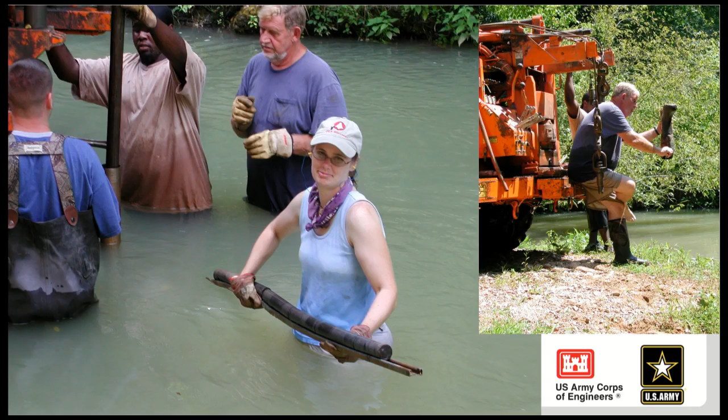And never mind, there we go. And if you told me I was going to be doing this in high school, or even the first part of college, I don't think I would have believed you. I didn't even start out college as an engineer.

And I have to admit, I spent a good bit of my childhood thinking that I did want to be an engineer. So there's a funny little part of this story: my 4th grade teacher burst my bubble completely when she didn't want to talk about driving trains when we were talking about engineering in math class. Yeah, I really did think that for a while.

So I know that life can be a little unexpected, and I ended up becoming a geologist and later an engineer. I was really surprised, though, when I ran across a speech by former President Dwight Eisenhower in 1957, and he said something that I think is relevant to us today within our profession.

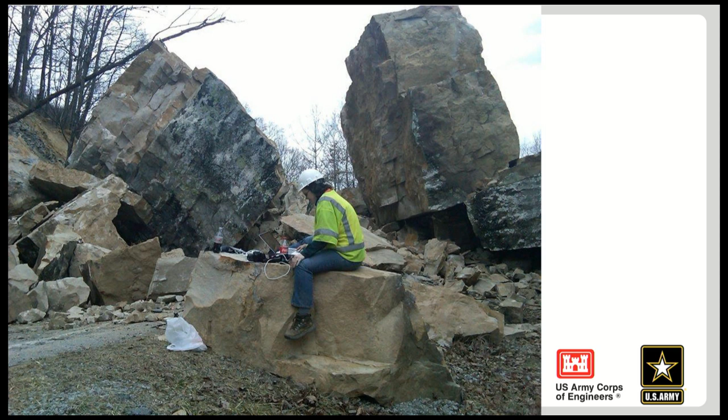Which is why one Sunday when I thought I would be attending a Boy Scout breakfast, I ended up on top of a rock, as seems to happen a lot in my career, dealing with a toppling failure. And so it rained. I wasn't surprised to get the phone call, although I was definitely surprised not to get to eat my bacon.

But it struck me as I was thinking about this speech that you learn a lot from this kind of dichotomy, this tension between plans and planning, doing this kind of work. Plans are useless, but planning is everything. After all, some of the best rock drains I ever designed started out as rock bolt holes.

We drilled them for an entirely different reason, and the hole decided to make water and continue to make water. So you could say, I'm determined this bolt's going to go right here and deal with the water problem, or you can say, I really did need some drains. I think I'm going to make a new bolt hole over here and let this thing drain and let this one make water. The essence of the observational method is to look at what's happening while you are doing something and react to it.

We know emergencies don't happen exactly the way we plan. One of the things that I don't think we think about enough as a profession, though, is what happens when one common driver affects a wide variety of infrastructure at the same time.

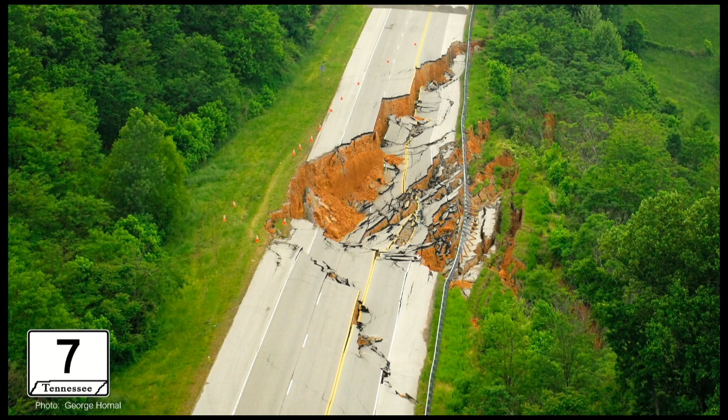So this is something that I think we really need to pay some time to. Some of these turned out to be quite large. Not all of them were small.

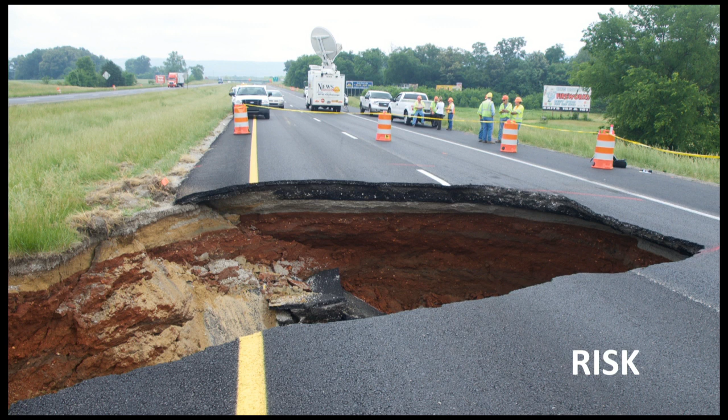And that brings us to this word, risk. We use it a lot, right? You hear it in a lot of presentations, risk. We talk about it. And we have to understand with our work how our projects can fail, under what circumstances, because it is fundamental, absolutely fundamental to good design and to developing resiliency within our infrastructure.

We look at the probability of failure. What's going to happen, maybe? How likely is it to happen? And what are the consequences of that?

Because not learning these lessons from previous projects can be catastrophic, right? You don't want to repeat mistakes of the past, even if it was not foreseeable at the time. You've got to learn from these failures to take these lessons forward.

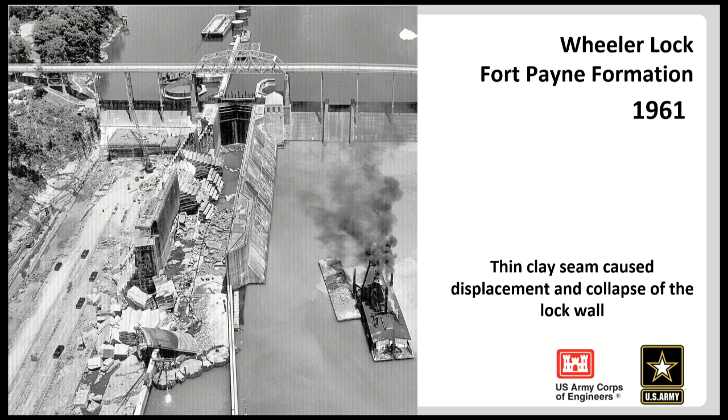We don't want lock walls collapsing inward and killing workers in the middle of an excavation. This is not how we want to see things happening. And so we design with these kinds of potential failures in mind.

It's the essence of what the Corps and many others call risk-informed design, right? The idea that understanding your potential risks improves your design, improves your safety, improves the ability for you to design and monitor your projects in such a way that you can address these issues and deal with some of the challenges that may be ahead.

It's also why long-term monitoring, emergency action plans, and risk assessments are so important, because that's that planning piece we were talking about earlier, the difference between plans and planning. And it has something else here - it helps you develop your judgment. The judgment that you need to address these kinds of risks and to handle emergencies starts right here with planning.

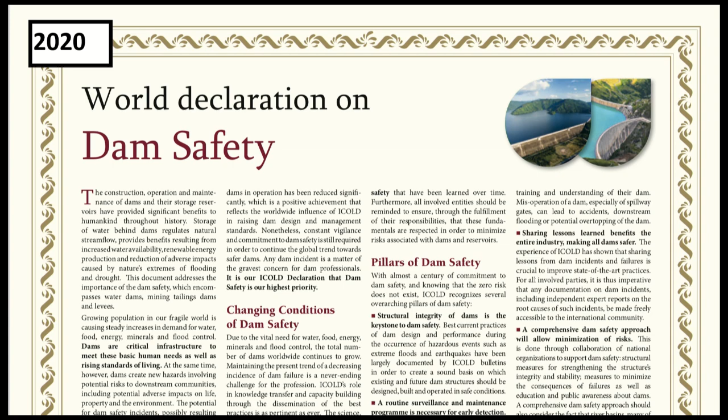With relentless preparation and study, it's not enough to just finish school. It's great, you got a nice shiny degree, you graduate, you walk out into the world, you take your PE exam. Oh great, I'm a PE, awesome.

You're not done. You're never done. Because as former President Eisenhower remarked later in his speech, if you haven't been planning, you can't start work intelligently. That's why it's so important to plan, because it keeps you steeped in the character of the problem you may one day be called upon to solve.

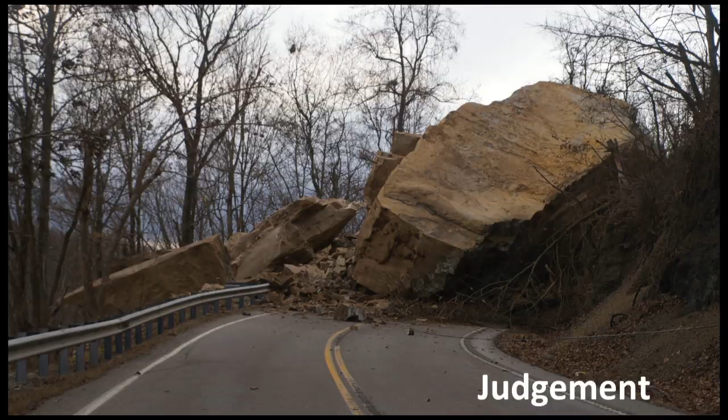Again, relatively profound. He was talking about national security, but it's got a lot to say in our area as well. So where does judgment come from? This is a question we've been asking ourselves in our profession for some time. Well, certainly it comes from experience, yes. And as Dr. Marr quipped in a recent presentation, it also comes from bad judgment, right? Learning from the mistakes of the past.

But I think we develop part of the judgment we need because of this fundamental dichotomy, this knowledge that we cannot define everything, that we are going to have to deal with the unexpected during construction, during long-term monitoring, dealing with our infrastructure. We have a dynamic situation we have to cope with. Failures are uncomfortable. We don't like to talk about them, at least when they're ours. It's a lot easier to talk about somebody else's failure than your own. But they are one of the most important teachers we will have and the most important guides to better judgment.

And so we must always be looking at these kinds of risks to our plans. How likely are these drivers to happen? We have to consider this in our designs as a whole. How will our infrastructure react to problems we may not be able to control, to forces we may simply have no control over? And how are we going to design for that? Do we design for that? How much do we design for it? How big do we build it? How much resiliency, you've heard that word a lot, do we put into the system?

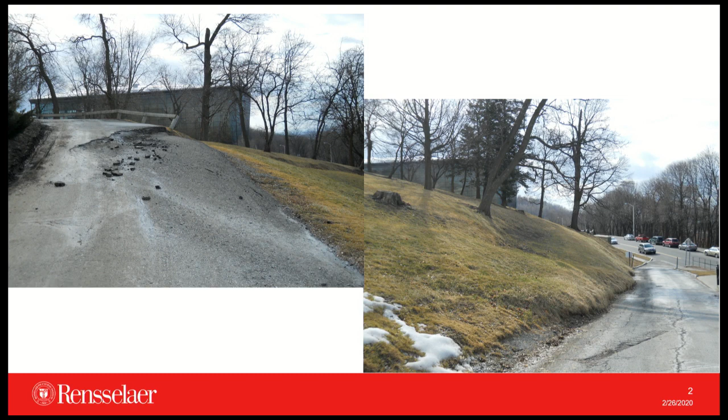Even if you don't want to spend time teaching your students or hoping they learn engineering judgment, those of us who report to ABET will have to find a way to assess that. That's part of the new criterion for ABET. I just heard from Scott Brandenberg that being the ABET coordinator is not a job anybody should take on, and it's my new job in our department. But I'm hoping that the work we're doing at RPI gives you a tool to assess engineering judgment in your students, even if you don't know how to do that yet.

The next piece is really about learning. Maybe all of us could close our eyes and think back to a time we had an impactful moment in a classroom. For me, it was in my earth science class with Mr. Kenzel, who would make this face imitating students taking a Scantron exam, pressing the pencil so hard they'd rip through the page, tongue sticking out. That's burned in my memory as an impactful learning moment. Maybe there are special things we can do in the classroom to really engage students in our topic, in geotechnical engineering in this case.

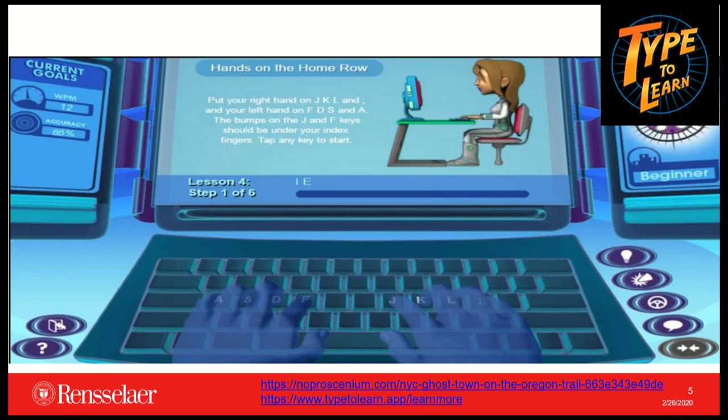But I want to speak to an educational game that we're working on at RPI. Educational games have been around for a while, and obviously some leave lasting impressions on our personal educational journeys.

I'd like to think that perhaps GeoExplorer is part of the future of educational games. It was developed through NSF funding and collaboration between researchers at RPI, Northeastern, Southern Methodist University, Broad-Based Knowledge, Cal State Fullerton, and Manhattan College. The important tenets were to provide practical field experience to undergraduate geotechnical engineering students and build in assessment of their performance within this virtual space. Teaching engineering judgment is a gap in our current pedagogy.

Now, as we travel on this virtual road, let's see if perhaps this is a way to teach engineering judgment. We are arriving at a field site where students can conduct a CPT. This exercise is part of an exciting new mixed reality experience to integrate field testing and practical experience into the existing civil engineering curricula. Students have the opportunity to conduct a CPT at four different field sites.

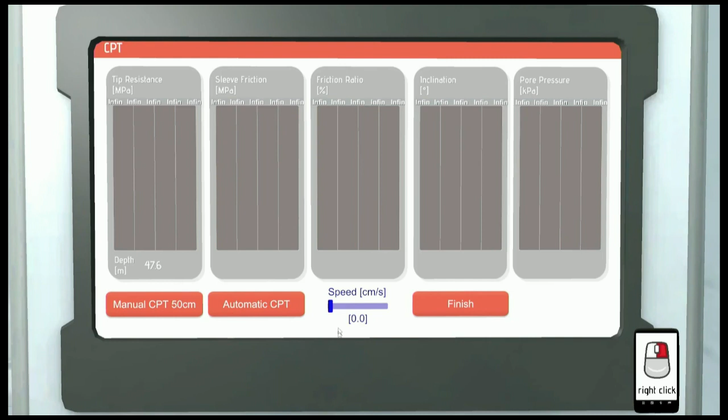The messaging that appears on screen consists of questions that in previous educational research would likely have been included as a survey or in-class assignment. This built-in assessment tool allows us to gather information about the student's knowledge and confidence related to CPT in a sneaky way, simply as a conversation with the boss.

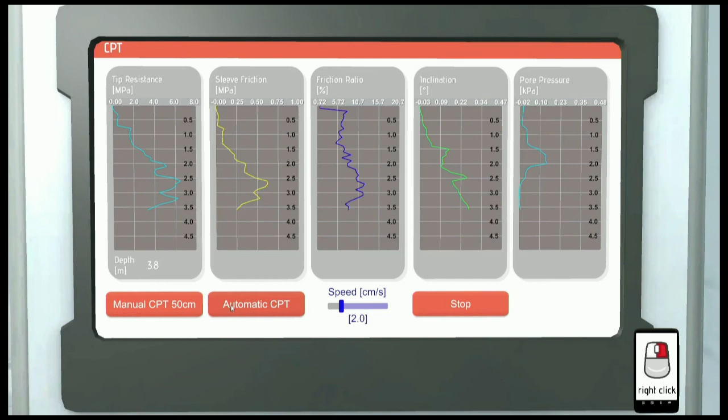As we begin to collect CPT data, this is further opportunity for students to learn through doing. Students must select the speed to advance the cone, using manual advancement for the first few meters before setting the test to automatic. As the cone advances, students must monitor the tip resistance values and inclination angle. The stopping depth is selected by the student based on their own judgment and instructions from the boss. For each site, students interpret their collected data and report back to the boss about the soil type encountered at a relevant depth.

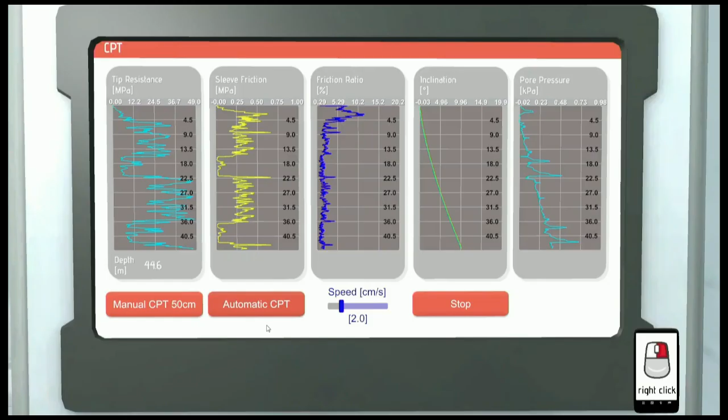The student's selections are recorded along with other gameplay data, such as how long they spent on certain tasks. A valuable feature of this CPT environment is the ability for students to fail with a safety net. As you saw there, one student said, 'My boss is going to be mad.'

We will combine the previous Levee Patroller assets into the GeoExplorer space. In this new robust GeoExplorer game, we will provide lots of opportunities for students to practice engineering judgment, and through the built-in reporting feature, we may also have an automatic assessment of their applied judgments. The mixed reality piece of this project is currently realized through a mock internship experience with the fictitious company Terra. Students apply for a position on the Terra website and receive an email with their welcome package and instructions to complete assignments within the virtual environment.

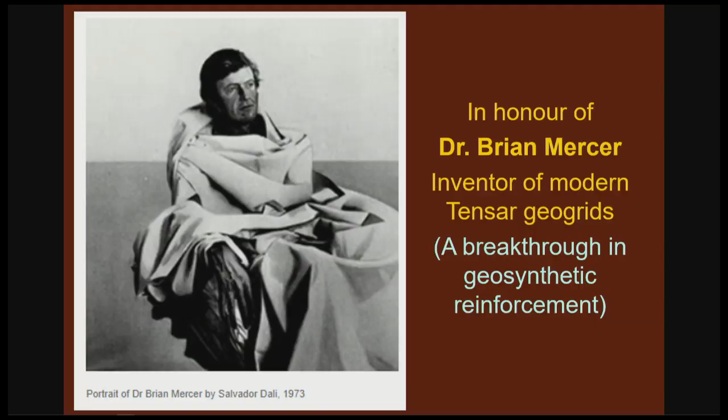It seems that today is a day of 40-year reminiscences. What I'd like to do over the rest of this talk is have you join me on a 40-year exploration of the role of geosynthetic reinforcement in allowing us to build embankments on soft and difficult soils. At the end of this presentation, I'd like to leave you with three key points. Firstly, it has now been very well established over decades that geosynthetic reinforcement is a very cost-effective means of building or augmenting soil behavior in constructing over very difficult soils.

In designing and constructing embankments on soft soil, reinforcement can play a very key role, so it's essential to understand the properties and characteristics of that reinforcement if we're going to have good long-term performance. However, reinforcement is not magical. It has never been to Hogwarts. It is never delivered with a wand or skyhooks. Like every other engineering material, for it to be effective, it must be incorporated in an appropriate design.

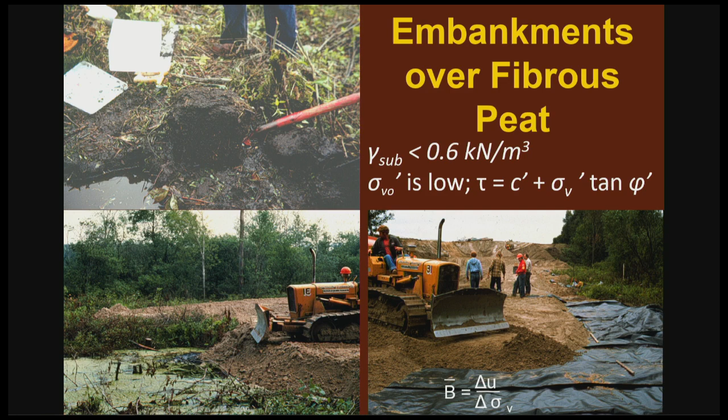We need to consider the pore pressures relative to the applied stress, and we need to control the pore pressures so they do not exceed a reasonable value. Even with that, it's a challenge to build over peat.

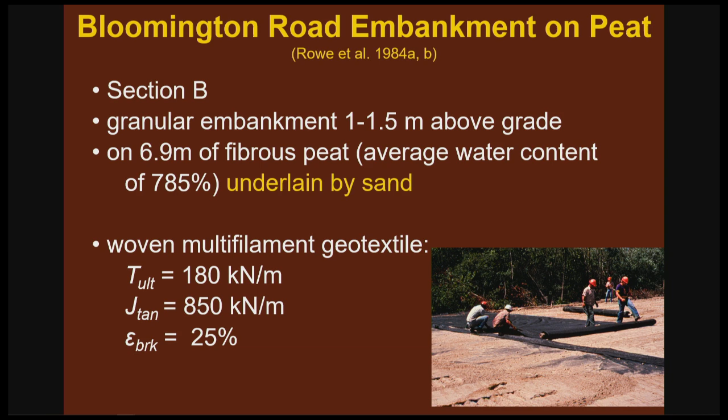Our first objective was to build a 1 to 1.5 metre embankment above grade. We had several instrumented sections, but the most challenging was over 6.9 metres of fibrous peat underlain by sand. For this, we used a very strong multi-filament geotextile with an ultimate tensile strength of 180 kilonewtons per metre, a tangent stiffness of 850 kilonewtons per metre, and a break strain of 25%. This was the first time in Ontario this had ever been attempted.

The embankment was constructed in 3 stages; we're going to talk about 2 of them. In the first stage, 2.74 metres of fill was placed, and at the end of fill placement there was 2.6 metres of settlement. But the reinforcement was working and had developed a strain of 5%.

It was then left for 8 months to allow pore pressure dissipation. When we came back at the end of 8 months, our 2.74 metres of fill had given rise to 3.1 metres of settlement. Since the water table is at the ground surface, this meant that portion of the road was now submerged, as we see here.

But as those pore pressures dissipated, the peat gained strength. And as it gained strength, the reinforcement became less critical, so the strain in the reinforcement decreased from 5 to 2%.

We now add additional fill to bring the fill to 5.9 metres. At the end of its placement we've got 4.2 metres of settlement, and the strain in the reinforcement is 11.5%, well below the failure strain.

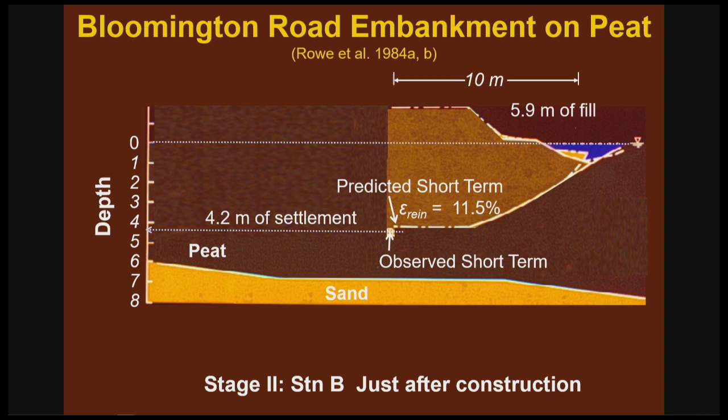It's now left for 2 years to allow pore pressures to dissipate. After the end of those 2 years, before the final finishing steps, our 5.9 metres have got us 1.1 metre above original ground level, and the strain in the reinforcement dropped from 11.5 to 8%.

This is fairly typical of what you get on a traditional soil, where the peak pore pressure is reached either during or at the end of construction. After that, as excess pore pressures dissipate, the soil gains strength and the reinforcement becomes less critical, so the strain reduces.

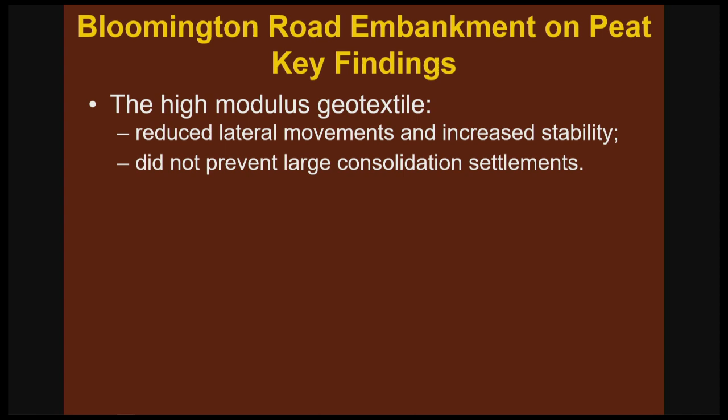So here the high modulus geotextile reduced lateral movements and increased stability, but it didn't come with skyhooks. If you're going to get large consolidation settlements without the reinforcement, you're still going to get them with the reinforcement.

Control of pore pressures was critical, and they were kept to about 1/3 or less of the total stress generating them. Effective deformation and strength parameters, together with pore pressures, provide very good predictions of what was going to happen.

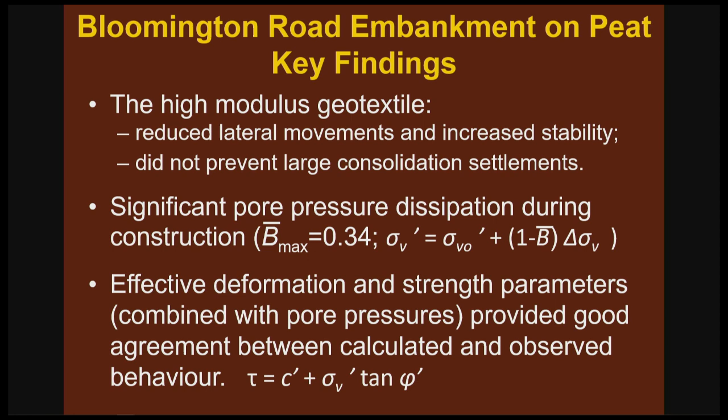Here is a second embankment with much less peat, less than 2 metres, but even more challenging in ways because it's underlain by very soft organic silt with a very low shear strength below the peat. The silt itself was underlain by a good sand layer.

Again, we want to get 1.3 to 1.7 metres above grade, and here a polypropylene biaxial geogrid was used. You can see the geogrid on top of the peat deposit, and as the embankment advances towards this location, there's also a tension crack just formed in the peat.

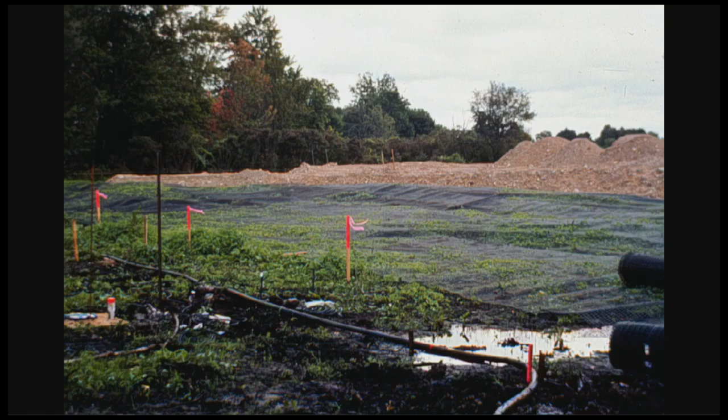Here we see the embankment being advanced towards a monitoring section. And what do we find from this?

Firstly, again, the rate of construction control was critical to short term stability. Everything was good if you kept below about 38% of the total stress. But at one point, the contractor got a little too exuberant, piled the soil too high, pore pressures went to 70% of total stress, and a failure occurred, reinforcing the importance of controlling pore pressures during construction.

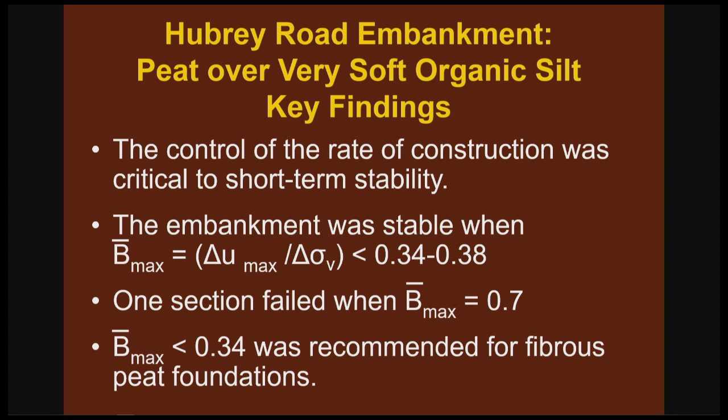Now, with case histories like this and calibrated numerical models, you can come up with design guidelines, such as the one you see here, where for a given height of soil above grade and unit weight, you can calculate what stiffness of reinforcement is needed. So strength, yes, it's important, but stiffness is critical to many of these applications.

So if we wanted a stress of 30 kPa at ground level, and the peat were 3 metres thick, we only need a very low stiffness reinforcement. At 5 metres, we need about 400 kilonewtons per metre. For 8 metres, we need about 800 kilonewtons per metre to carry the weight of the soil above the ground level.

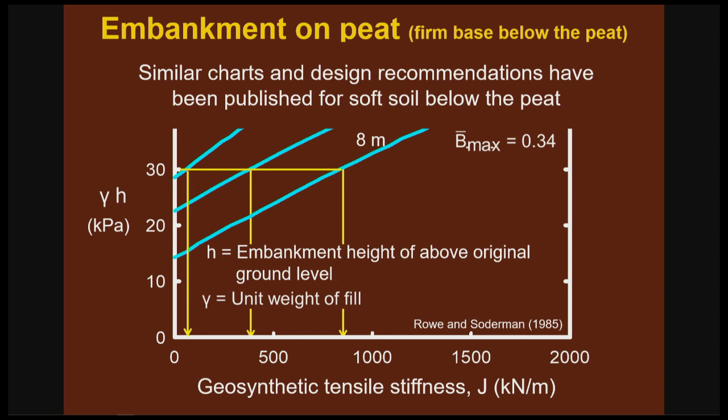Now, that was the case on a firm foundation, but similar design recommendations and charts were developed with a soft soil beneath it. That's a case where we're looking at partial dissipation of pore pressures during construction. Now let's go to undrained construction.

Here is a 3.3 meter thick organic clay with an undrained strength around 8 kilopascals. To perform the first embankment construction, soil was excavated to create a trench and used to form a retaining bank. Then hydraulic fill was placed until failure occurred, at a fill height of 1.75 meters.

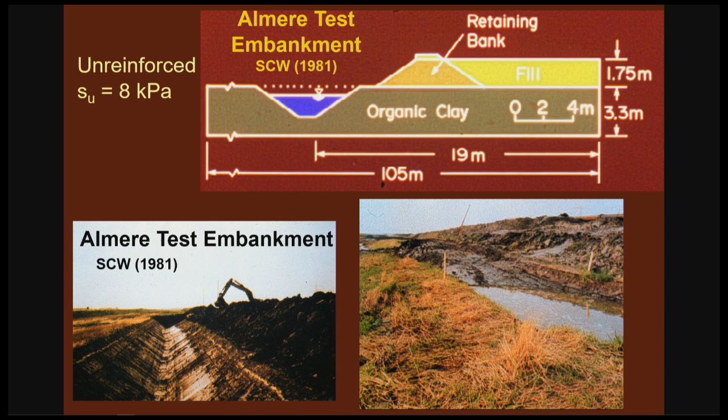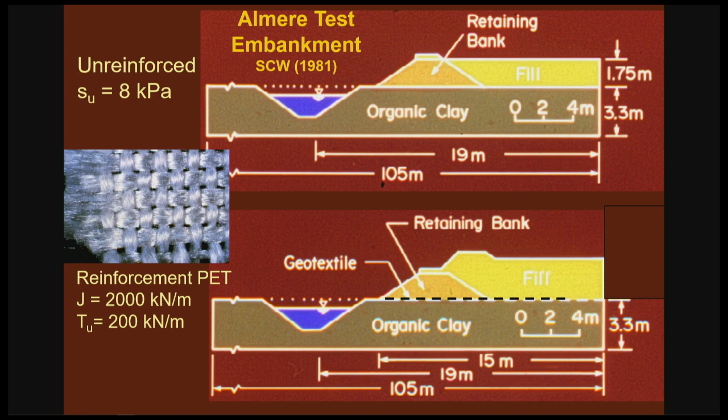At a second section, a layer of relatively high strength reinforcement was placed on top of the organic clay. Then the trench was excavated, the retaining bank of excavated soil put on top of it, and the hydraulic fill placed until failure occurred at a height of 2.75 meters. That's 60% higher, so it definitely shows a significant benefit of the reinforcement.

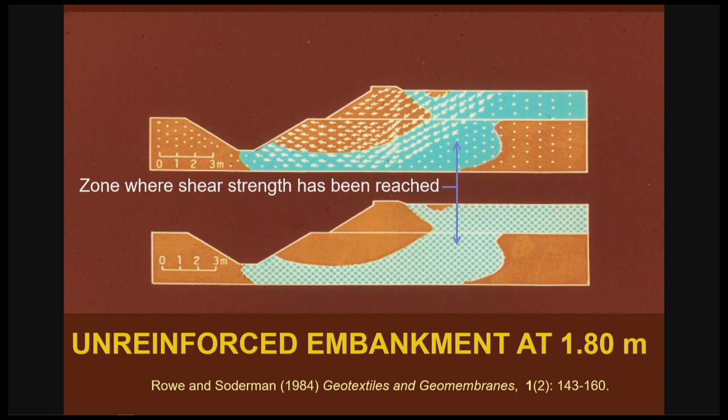Now, if we do a finite element analysis of the unreinforced embankment, it tells us more or less the same thing as limit equilibrium. It shows you that at the failure height, we have uncontained plasticity and a failure mechanism that passes tangent to the base and through the toe.

But what limit equilibrium doesn't tell us is what is happening in the reinforced case. At 1.8 meters, we have contained plasticity because the reinforcement is carrying some of the load that would otherwise be transferred to the soil. But by 2.05 meters, we have uncontained plasticity, and all that's holding the embankment together from here on is the reinforcement.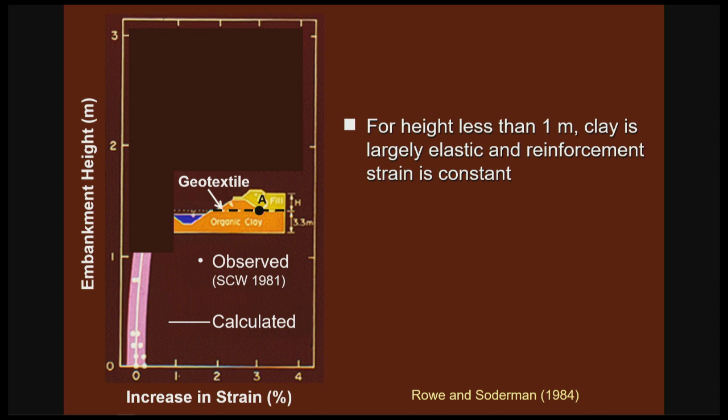The reinforcement's not needed. But as we go from 1 to 2.05 meters, plasticity develops, and at about 2.05 meters, we have contiguous plasticity, and the reinforcement is becoming critical. You can see the rapid increase in strain as we approached 2 meters. Now, 2 meters is roughly the design height with a factor of safety of 1.3.

This is typical of many design applications in traditional soils where at the end of construction the pore pressures are going to dissipate. We need the reinforcement to give us our factor of safety, but the strains in the reinforcement are quite small. It's there in case we got the strength a little wrong.

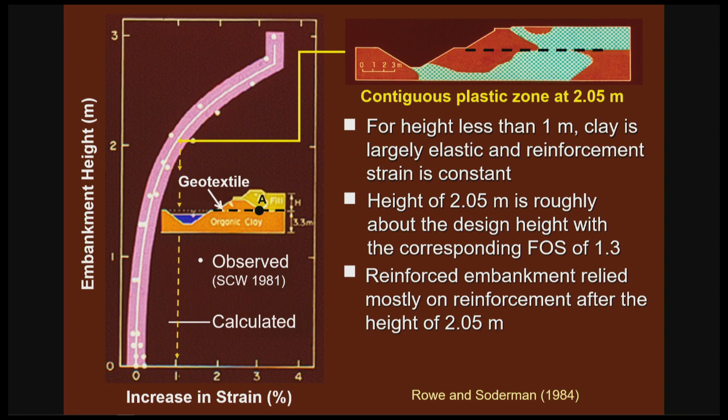Now, if we go a little higher, the strains really develop quickly until failure occurred. In this case, they occurred at a strain of 3.3%. That is about a third of the strength of this material, a third of the break strain.

So why did it occur? Because of insufficient anchorage. The reinforcement pulled out between the organic soil above it and below it.

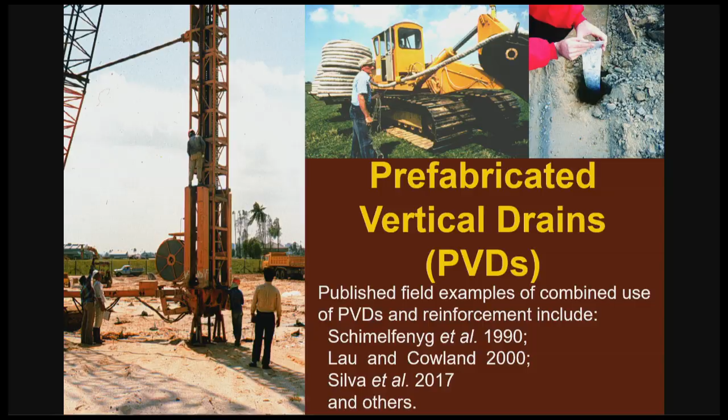So we've now explored traditional soils with partial pore pressure dissipation, undrained. There are often situations with traditional soils where we need, for clay, some pore pressure dissipation during construction. Here, prefabricated vertical drains, or PVDs, become quite critical to a cost-effective means of reducing pore pressures. They've been around for 30-odd years, very effective.

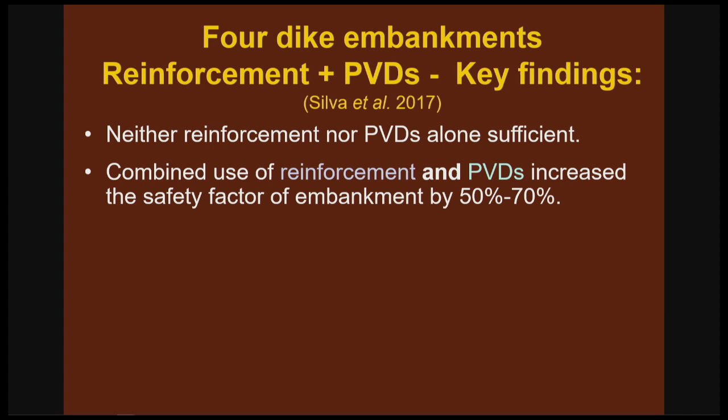A very nice case that describes their effectiveness, published in 2017, looks at 4 dikes, heights of 5 to 11 meters on a soft clay, tensile reinforcement, PVDs, and shows that in these cases neither reinforcement nor PVDs alone were sufficient. But their combined use increased the safety factor by 50 to 70%.

The reinforcement increased stability and allowed more fill to be placed for consolidation. The PVDs accelerated the consolidation process, but again the reinforcement did very little to manage consolidation settlements. But the PVDs did provide for much more rapid pore pressure dissipation and hence strength gain.

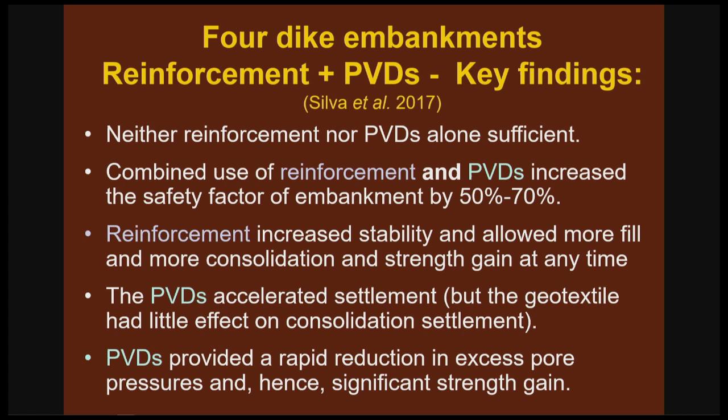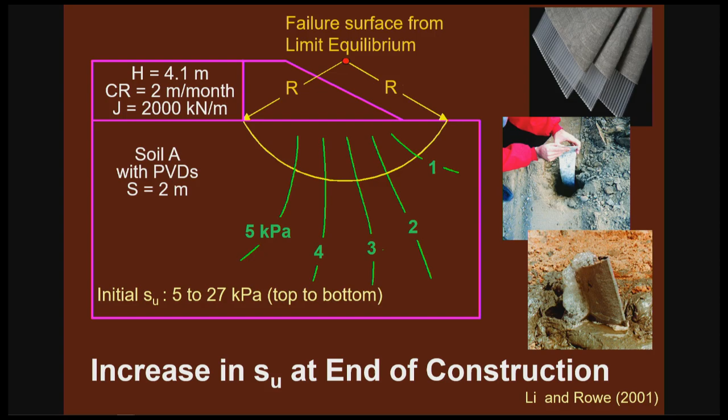Now, these have all been fairly traditional clays or soils where the pore pressures reach a maximum during or at the end of construction.

Let's now turn our attention to rate-sensitive soils. You could certainly argue that all clays are rate-sensitive, and you'd be right. But what we're particularly interested in are highly rate-sensitive soils where the maximum excess pore pressure is not reached at the end of construction, where in fact the pore pressures continue to build up afterward. In 31 cases looked at by Crooks et al. in 1984, a third of them fit this category.

This has been a particular challenge in the province of New Brunswick in Canada, where the Department of Transportation had an embarrassing situation where embankments were failing after the end of construction. To try and see how reinforcement could address that problem, we got to build two test embankments to failure, one with and one without reinforcement. We only have time for the second tonight.

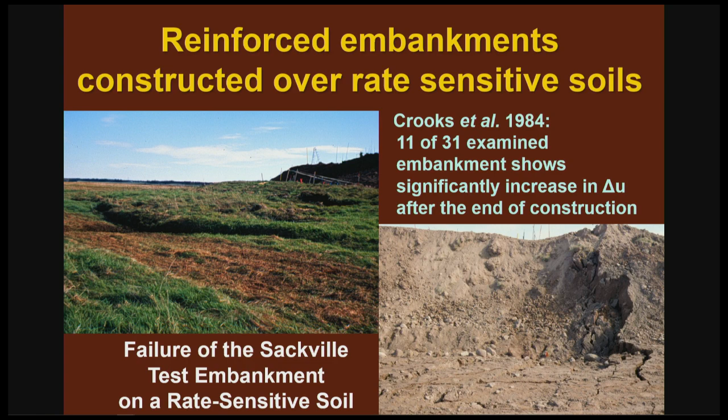This embankment, the reinforced one, was built with a relatively strong geosynthetic reinforcement with a failure strain of 13%. It was successfully constructed to 8.2 meters and left. And it sat there for a while.

But as it sat there, the pore pressures increased. As the pore pressures increased, the effective stress decreased. As the effective stress decreased, the strain in the reinforcement increased, until the reinforcement failed at a strain of 13%. Then the instrumented point at the toe rose up about 2 meters above its original level as the failure occurred.

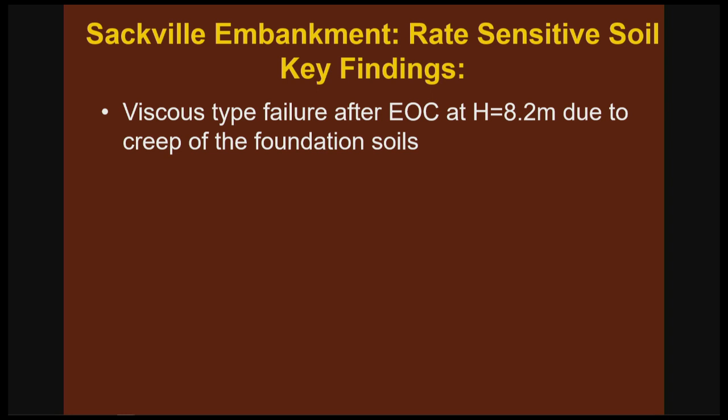So this is a viscous type failure after the end of construction, due to creep and destructurization of the foundation soil. The deformations, the creep and destructurization, lead to excess pore pressures increasing and a decrease in shear strength.

The field vane, even when you apply typical corrections based on plasticity index, overestimated the actual mobilized soil strength at failure. And when one compares the unreinforced and the reinforced sections, the reinforcement significantly increased the failure height, and at a given failure height, reduced the amount of viscoplastic deformation.

So taking this soil and doing a numerical experiment to the design height based on traditional limit equilibrium calculations, using the vane strength with typical correction, a factor of safety of 1.3, and a typical allowable design strain of 5%. Now we're going to numerically build on the same soil profile as the Sackville embankment to a design height of 6.75 meters, and plot the largest strain in the reinforcement versus time.

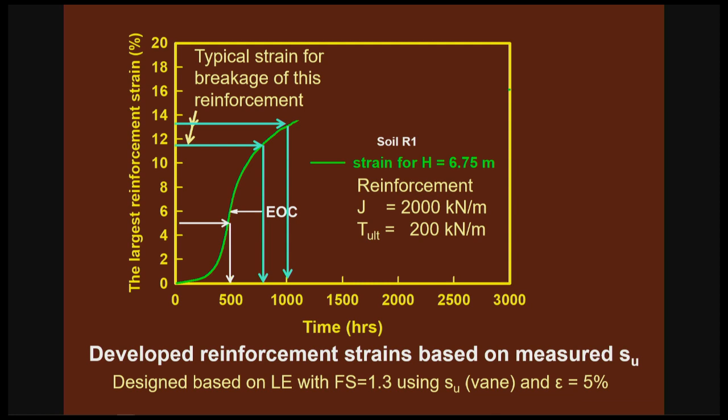Now, if this was a traditional soil and the pore pressures dissipated, everything would be fine. But it's not - the pore pressures keep on going up. This reinforcement would typically fail between about 11.5% and 13% break strain. If that's the case, it would fail between 12 and 21 days after the end of construction. But if the reinforcement could sustain a strain of 16% or more, then ultimately everything would be okay.

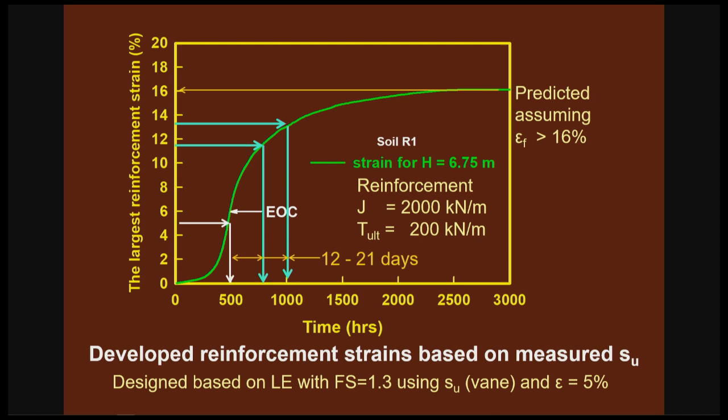But it shows us that we have to consider the viscoplastic behavior of these rate-sensitive soils together with the reinforcement, and assess what is a suitable mobilized strength for the design. I don't have time to go into the details of that, but anybody interested can refer to our paper.

And I now want to add one extra level of complexity: the viscosity of the geosynthetic. Up to now, we've assumed elastic reinforcement. For many geosynthetics, that's not a reasonable assumption.

So how does this affect the overall performance? Going back to plotting the net fill height versus the long-term design strain, for a rate-sensitive reinforcement and a rate of construction of 10 metres per month: if our allowable mobilised strain was 3%, we could get to 2.9 metres fill height above original grade. If it was 5%, we could get a little over 3 metres.

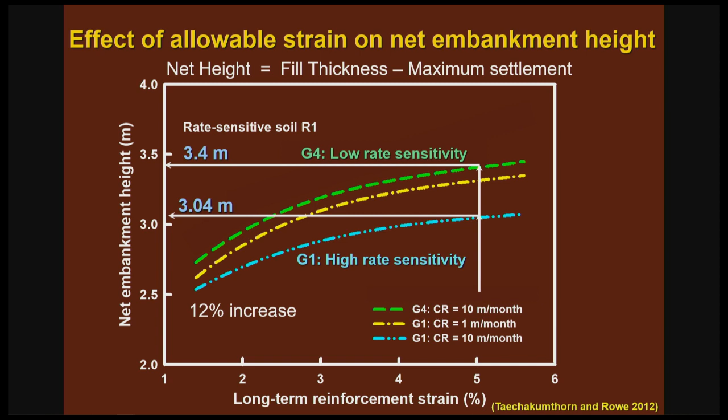Again, I don't have time to go into the details, but anybody intrigued can read the paper.

And this is going to lead me into much more recent topics of column-supported embankments. We're going to begin looking at floating column-supported embankments, firstly without and with geosynthetic reinforcement. So the scenario we're looking at is shown here.

We've got columns or piles. They could be deep mixed columns, or they could be concrete piles, floating in the soft soil. We have potentially a layer of reinforcement, a load transfer platform, usually of a coarser granular material, and then the embankment fill itself.

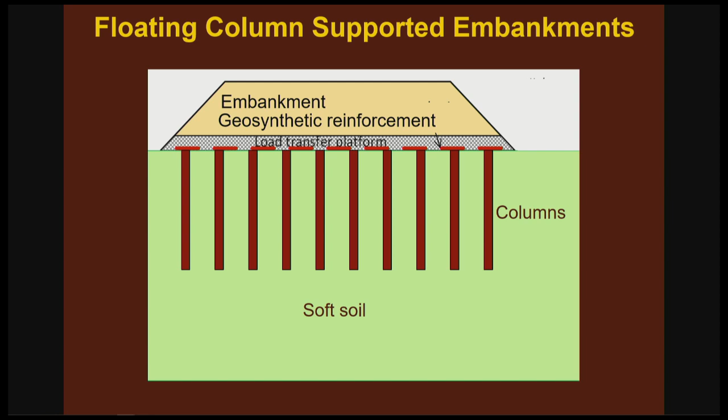A case published in 2012 and analysed in 2015 looked at 3 field constructions. We only have time to talk about 2 tonight. S2 was an unreinforced pile-supported embankment, and S3 was a reinforced pile-supported embankment on the same deposit.

In the case of the unreinforced embankment, the settlement of the subsoil between the piles was around 130 millimetres for the loading conditions, while at the pile head it was only about 10 millimetres, leading to a differential of around 120 millimetres, which will propagate towards the surface of the embankment.

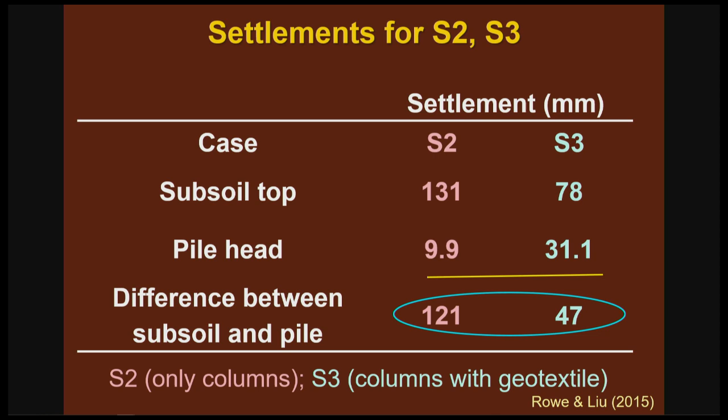If we had the reinforcement, we get a much better distribution of the load. Load is transferred from the soil between the piles to the pile head. As a consequence, we get less settlement of the soil between the piles, around 80 millimetres in this case, and more settlement of the pile head, around 30 millimetres, reducing the differential to about 47 millimetres. So the choice of reinforcement and its addition is important.

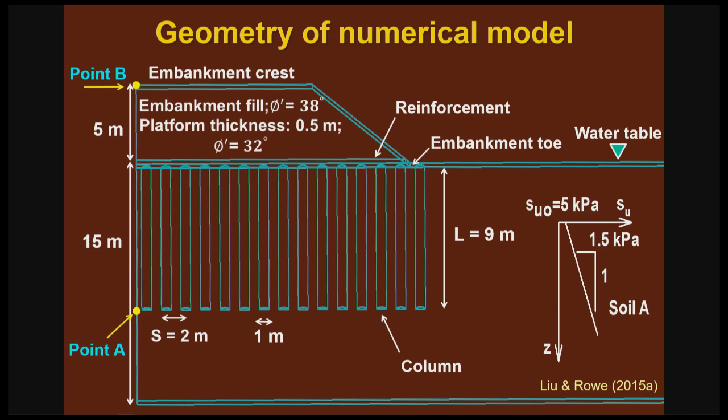Now, what can we do with prefabricated vertical drains? Here we've got some deep mix columns, and at the centroid between them we have a prefabricated vertical drain. We're looking at a cross-section, and we're going to focus, because of time, just on 2 points: one at the bottom level or elevation of the columns, where we'll look at pore pressures, and the other at the top of the crest, the embankment, where we'll look at settlement.

Starting with pore pressures at point A, if we had a plot of excess pore pressure at this location without PVDs, we get the curve in yellow. You can see at the end of construction we're about 85 kilopascals, and after 3 months, it's dropped to about 68. It takes about 7 years to get 99% degree of consolidation.

If we put in the PVDs, in this particular case, it didn't make that much difference to the end of construction pore pressures, but it made an enormous difference to the rate of dissipation. After 3 months, we're down to 23 kilopascals, and it's pretty well over by a year.

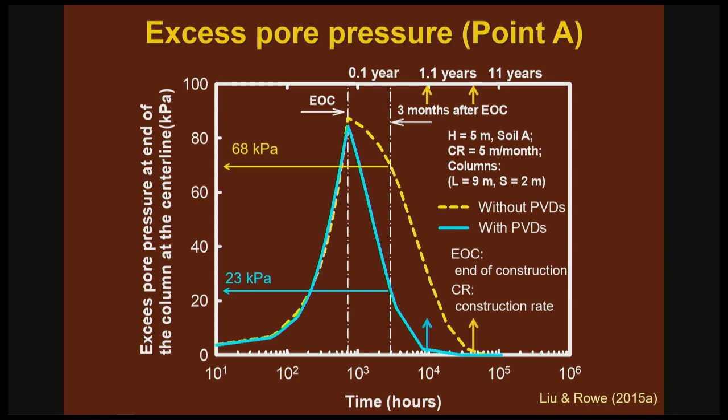Now, what about the viscosity of the reinforcement?

Here we're going to look at both a viscous foundation and viscous reinforcement. We're back to the same soil profile we looked at before, but with no PVDs in this case. We've got the same design height of 6.35 meters and a construction rate of 10 meters per month. But now we do have the columns that we didn't have before, and that changes the problem quite considerably.

We've got the same reinforcement, a G1 grid which is fairly rate sensitive. At the end of construction, we've mobilized about 4.5% strain. If the pore pressure dissipated from this point on, everything would be fine. But because it's a rate-sensitive soil with destructurization, the pore pressures build up, the strength of the soil goes down, and the strain in the geogrid goes up.

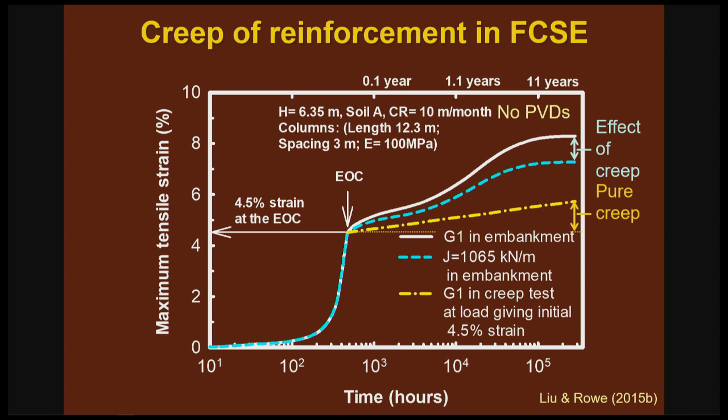Now we get a higher strain due to creep. What happens to the forces in the reinforcement? This is exactly the same problem, but we're looking at force instead of strain. If we did it for the elastic case with the same stiffness as at the end of construction, we would have a force of just around 60 kilonewtons per meter at the end of construction, increasing to about 95 kilonewtons per meter.

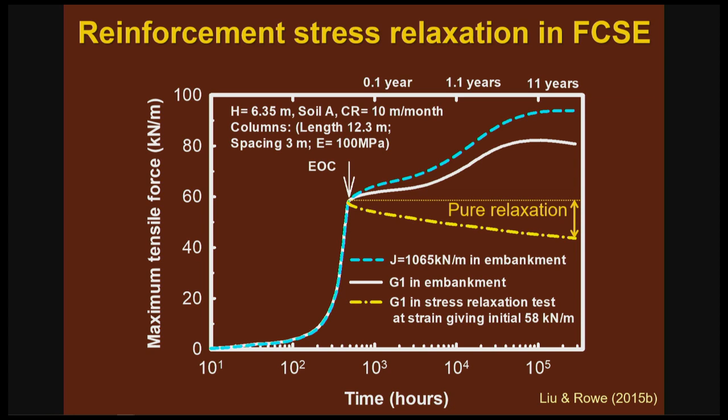If we have the viscous reinforcement, it again increases but less, because of relaxation. We're getting more strain but less force due to relaxation in the reinforcement. If we were just to hold the load constant at what it was at the end of construction, the reinforcement would lose the stress you see in this diagram due to relaxation. So we get both an increase in strain and a decrease in force in the reinforcement due to relaxation.

So stress relaxation tests or creep tests provide very useful information for input into appropriate numerical models, but they don't tell us what's going to happen in the interaction problem.

So this brings me to the last topic I'm going to touch on. I've gone a little faster because I know we're running late, but I do want to spend a few minutes on end-bearing column-supported embankments. It looks very much like what we were just looking at, except that now we have end-bearing columns or piles in a firm stratum.

I'm highlighting this because I'm interested in long-term serviceability. As editor of Geotextiles and Geomembranes, about 20% of the papers I receive each year are on this topic. Despite that, it is not well understood, and many design methods are severely lacking.

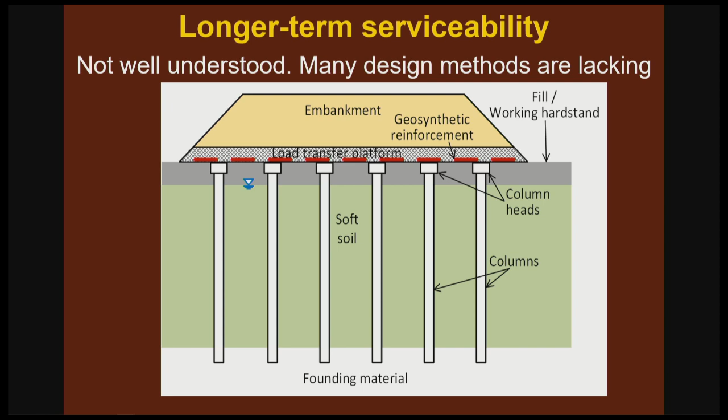If we think about what's happening in this case, we have a reinforcement which, to work, must deform. So if we're looking at the head of the column, we have a load A from the area of influence above the column head, and a load B which is being transferred to the pile from the soil between the piles. So the total load carried by the pile is A plus B. If we now go between the piles, we have a contributory load B plus C. Part of that load B is carried by membrane action through the reinforcement to the pile, and load C remains on the soil to cause deformation of that soil.

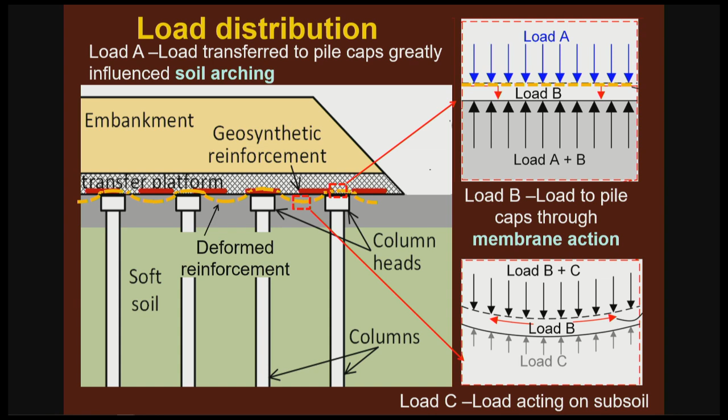Now, in dealing with these problems, soil arching is absolutely critical, and as Terzaghi said back in 1943, arching is one of the most universal phenomena encountered in soils in both the field and the laboratory. Many of the existing models assume the shape of a failure surface with soil arching, and many of those assumed failure surfaces lack any sound theoretical basis. They're based on empirical data for a limited range of test conditions, and while it may apply to those test conditions, the shape is being generalized far too much.

Soil arching is a deformation-dependent process. The deformation that is critical here is described by the reinforcement sag. Now, under certain conditions, you can get good agreement between what you predict with the design method and what you observe, but only if you have strain compatibility. Are you going to have strain compatibility in the long run?

Serviceability-based design really needs to depend on the time-dependent coupled arching stress reinforcement deformation behaviour. That's a mouthful because it is complex. It builds upon all of the things we've been talking about today, and more.

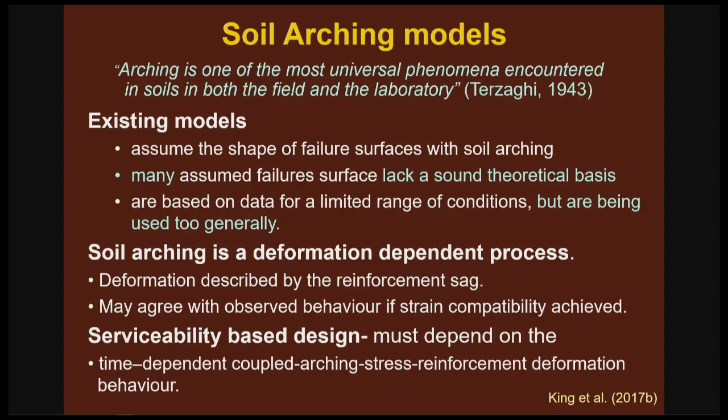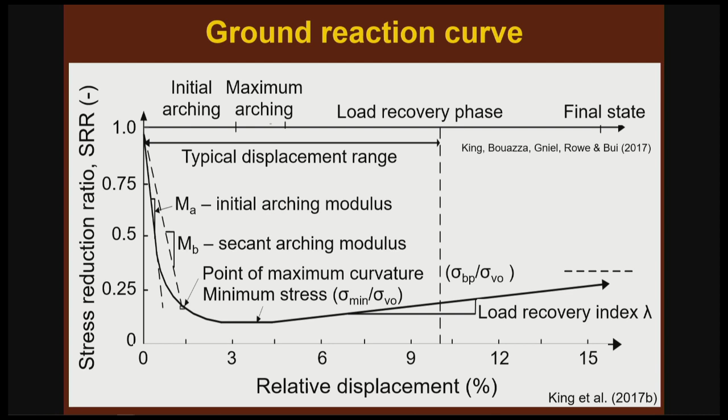To illustrate this, let's think about what's going on. If we have a dense sand, a pile, and subsoil settling around it, it is really very much like a bearing capacity problem. Above the pile, we're going to get type 1 shear bands forming, where the major principal stress is vertical, and outside we're getting type 2 shear bands, where the major principal stress is horizontal.

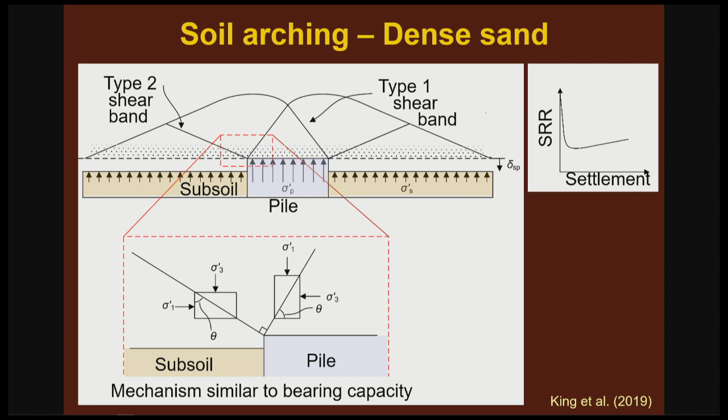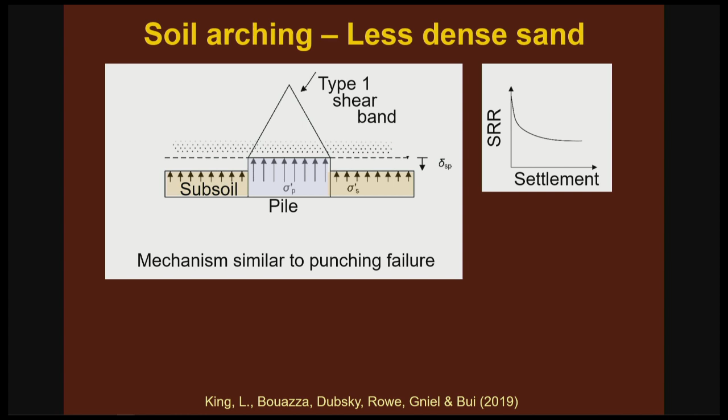And in that case, we can get a stress reduction ratio that looks like this. In a less dense sand, it's more like a punching failure, and we get our type 1 shear bands, but it's much less clear that we get type 2. We may get a relationship like this.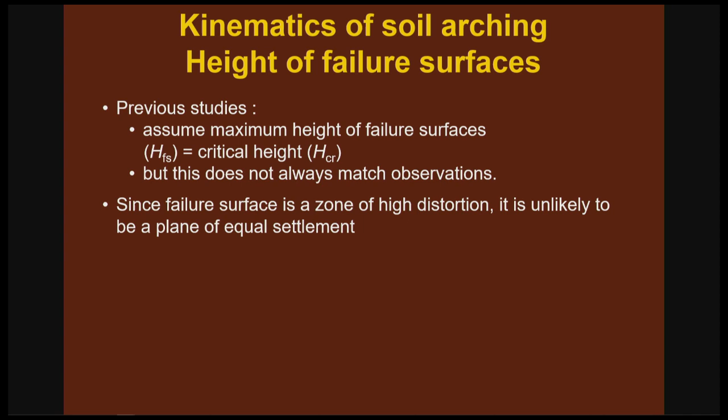Now why does this matter? Because many of the techniques being used assume the height of the failure surface is the critical height, but that doesn't always match observation. Since the failure surface is in fact a zone of high distortion, it's unlikely to be a plane of equal settlement. In fact, recent research is showing that while the critical height—the plane at which you get more or less equal settlement—is related to the height of the failure surface, it is most certainly not, in general, equal to the height of the failure surface.

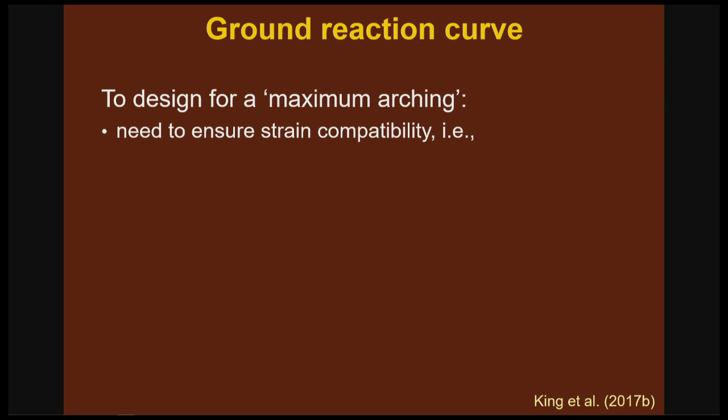So if you're trying to design for maximum arching, you need to ensure strain compatibility, which means the reinforcement stiffness must sag enough to generate the maximum arching stress, but not too much. Thus, while the reinforcement must have adequate strength, it also has to have the stiffness. Both are important, but stiffness is absolutely critical.

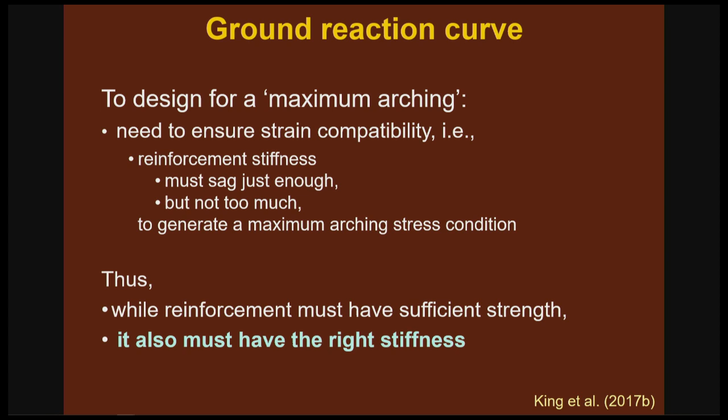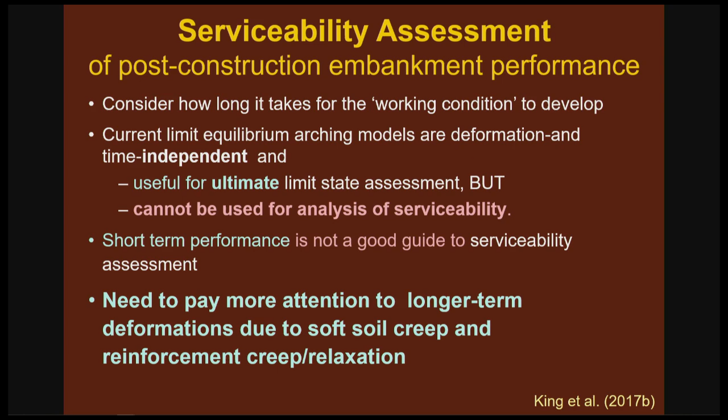Short-term performance is not necessarily a good guide to long-term serviceability. What we really need to do as we move forward in this area is pay more attention to longer-term deformations due to creep of both the foundation soil itself and of the reinforcements commonly used, to really learn from what we've discovered with respect to embankments on soft soil over the last 40 years.

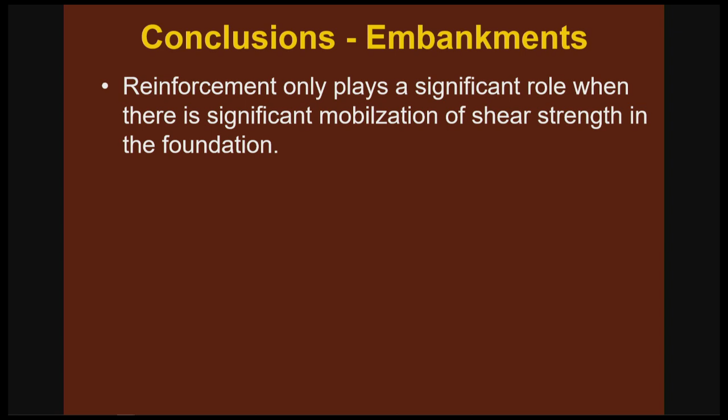So that brings me to the end of my last topic, a few conclusions. Reinforcement in embankments only plays a significant role when you have significant mobilization of strength in the foundation. The combined use of bearing capacity and limit equilibrium tends to work well for limit state design, the ultimate limit state, but care is needed to select the right shear strength, particularly for rate-sensitive soils.

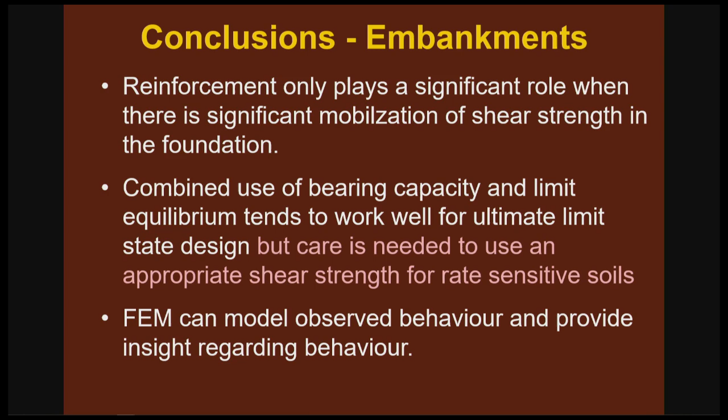The finite element model gives us good correlation with observed behaviour with appropriate model and parameters, and provides insight regarding that behaviour.

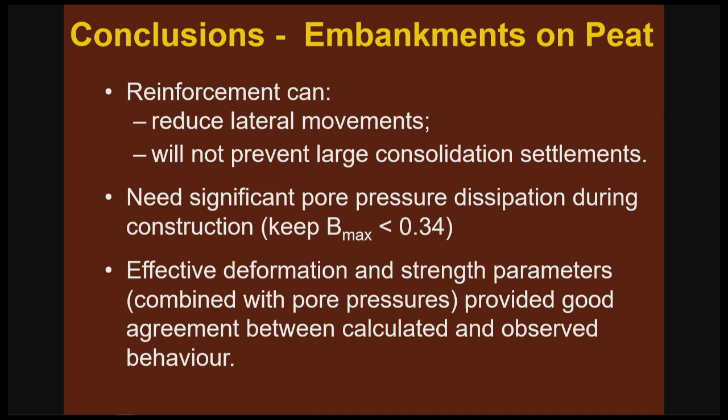We find that effective deformation and strength parameters combined with pore pressures provide very good agreement between calculated and observed behaviour. On rate-sensitive soils, where pore pressures increase after the end of construction, reinforcement strain can increase significantly even though the fill height has not changed.

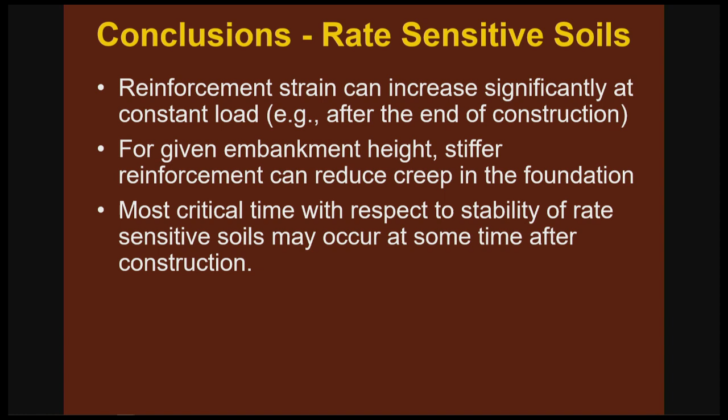For a given embankment height, a stiffer reinforcement can reduce creep in the foundation. The most critical time is when those pore pressures reach a maximum value, which is when you have minimum effective strength in your soil.

The strength from laboratory and field testing both need to be evaluated very critically to consider what will be the mobilised strain in the field and what is a real operational strength.

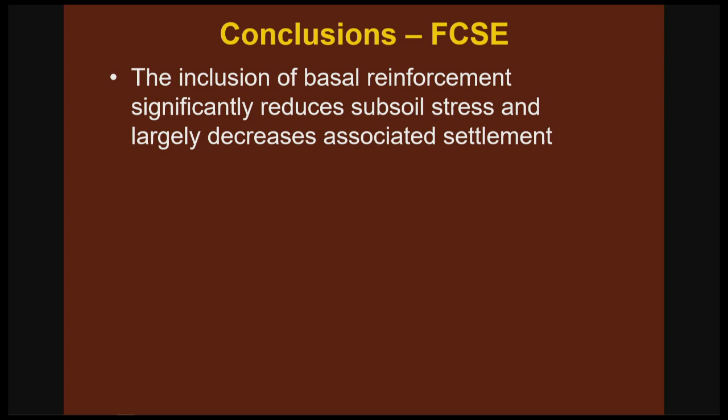For floating column-supported embankments, the inclusion of basal reinforcement significantly reduces the stress on the subsoil and largely decreases the differential settlement between the pile and the subsoil.

PVDs with reinforcement make things even better, and stress relaxation or creep tests are useful for giving insight into material behaviour, but need to be fed into an appropriate model to predict what's going to happen.

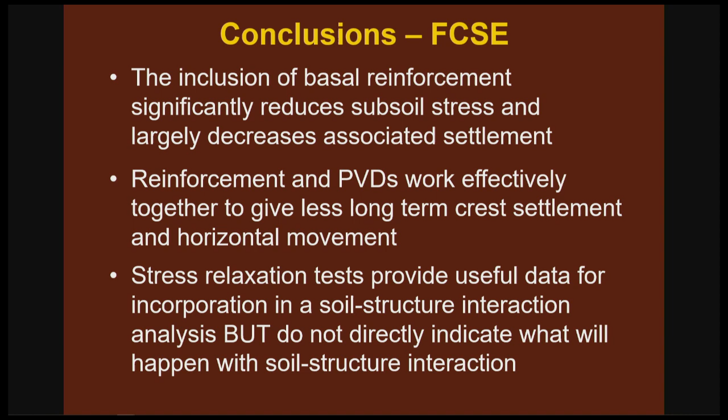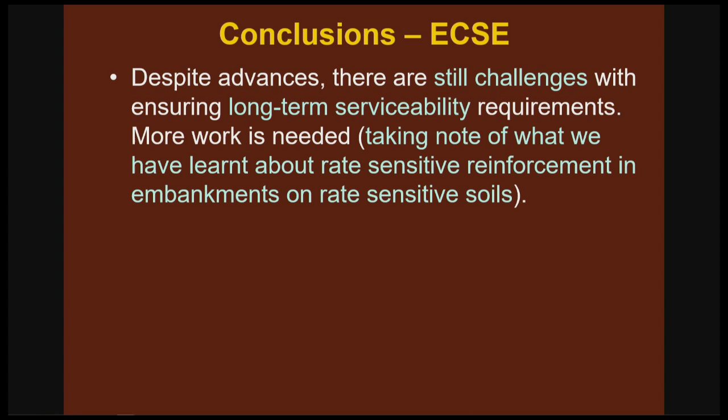Lastly, for end-bearing column-supported embankments, many advances have been made, but there are still challenges, particularly with long-term serviceability. We need to pay attention to both the time-dependent performance of the foundation and the reinforcement.

So in the last 47 minutes, I've covered a lot of ground. It's been based on a large number of full-scale field case studies, sophisticated laboratory research, and advanced numerical modelling.

Based on all of this, I come to three basic conclusions. First, soil reinforcement has been proven to be a cost-effective alternative to or augmentation of traditional construction methods. Understanding the properties and characteristics of geosynthetics is critical to success, combined with appropriate design.

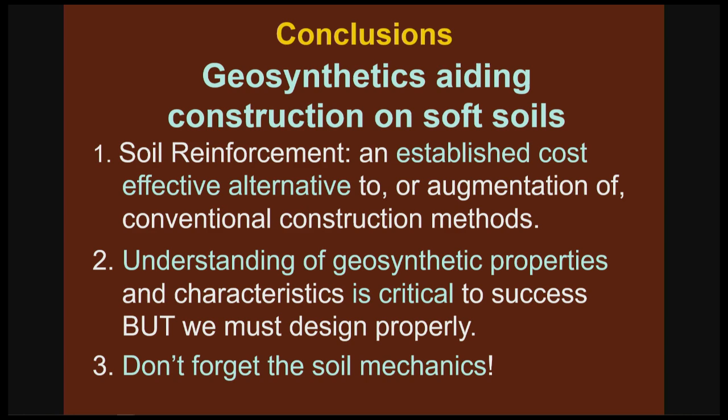And don't forget the soil mechanics. The issues about time-dependent soil behaviour and of arching are all fundamental soil mechanics issues.